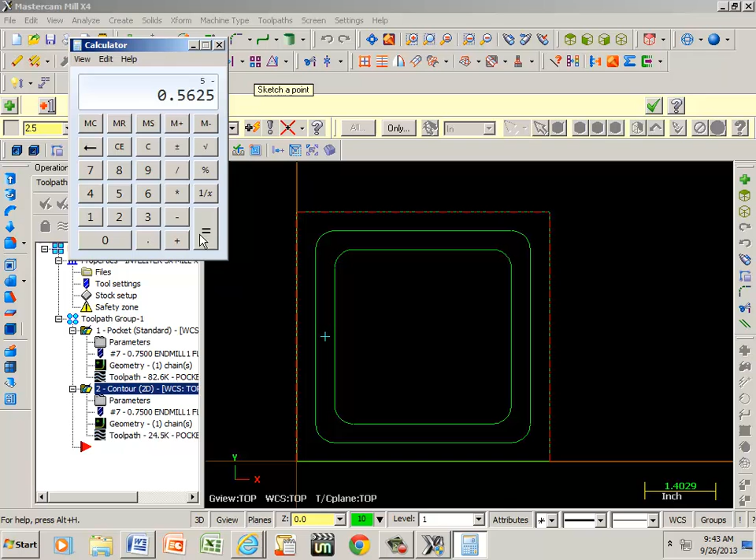All right, let's put one here. I know that half of it from here to here in my x-axis is going to be 2.5. Tab over. However, I'm not sure how far it is from here all the way up to here. I know from the bottom up to the top is 5. So I'm going to say 5 minus 9/16. Let's clear that. 5 minus 0.5625. It's 4 7/16, so 4.4375.

Okay. Now, since this is square, from here to here is 4.4375. That means that from here all the way over to here is going to be the same thing. So 4.4375, tab over, 2.5, tab. Okay, let's get to this point. Half of that is going to be 2.5, tab over, and 0.5625, tab. And now we have our points exactly where I want them. I'm going to hit green check for that.

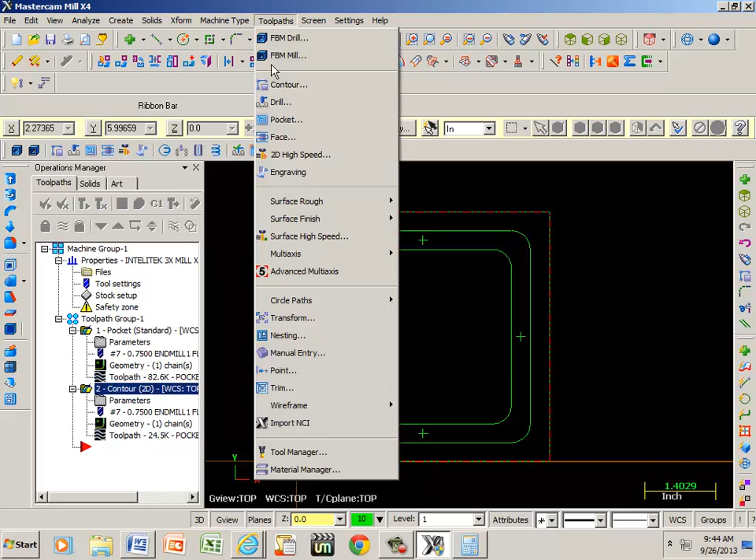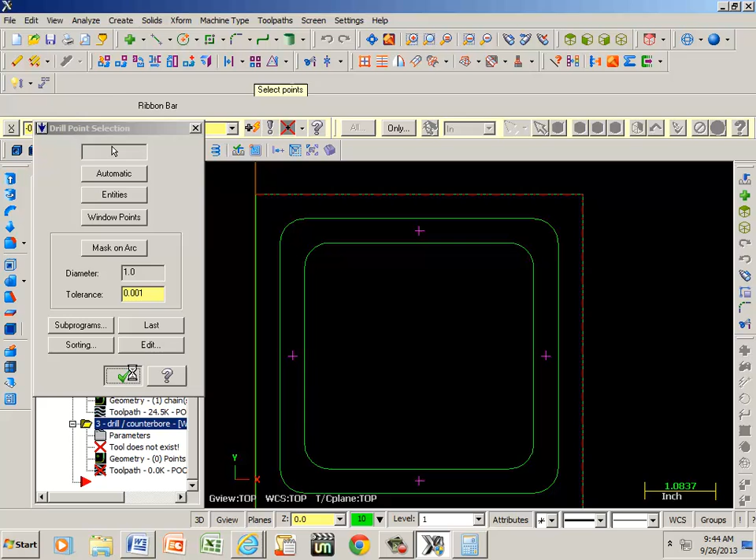And let's go to tool paths, and we're going to drill these holes. So we're going to select drill. Now, depending on where I click, depends on how it's going to drill these holes. And notice this too, whenever I get close to it, it just snaps right to the point. Click it, click that one, click this one, and then click this one. Green check. Let's go to tool, select library tool.

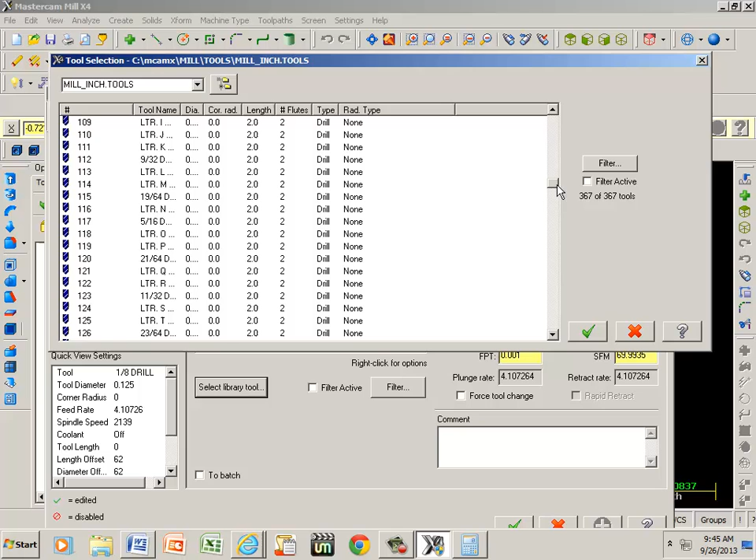Now I want to drill these holes 1/4 inch. So I'm going to look for a 1/4 inch drill. It's showing 261 of 367 tools. Normally I like to see all of my tools, so if I click this, I'm showing 367 of 367 now. Let's scroll down until I find a 1/4 inch cutter, which is 250 thousandths. And here it is here. I'm going to double click that.

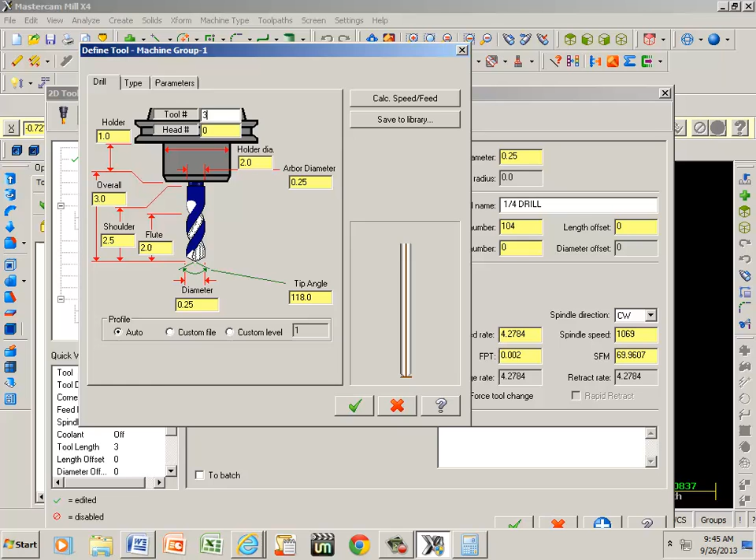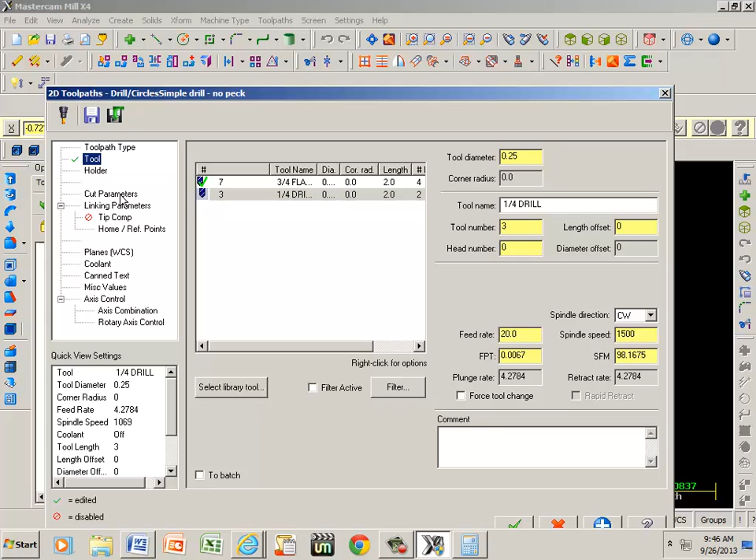Just like we did before, we changed that 3/4 to a number 7. Well, my 1/4 inch drill is a number 3 out there in the CNC machine. So if I double click that, change that to tool number 3. There, it changed it for me. Go ahead and change my feed rate. I'm going to drill it at 20 inches a minute. And notice I can go a lot faster than that now. I'm showing almost 70 surface feet per minute. I'm going to increase that to 1500. 98. That's very good.

Alright, cut parameters. It's showing drill and counter bore. Well, I want to do peck drilling. So if I click here, first option is peck drill. What peck drill does for us is it goes down, in this case 100 thousandths. It's going to go all the way back up to the surface. The chips come out, coolant flows in. It's going to go down to where it was at, an additional 100 thousandths until I give it the depth that I need to go. In this case, I'm going to go all the way through so we can see the bottom.

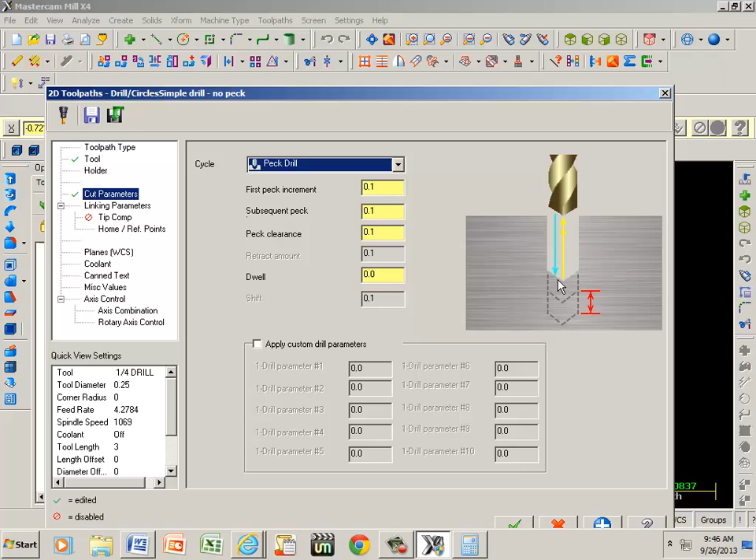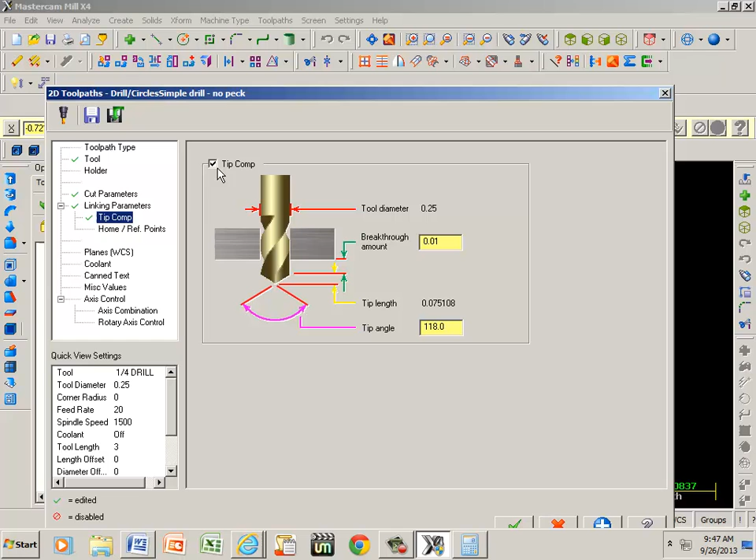And we know that the stock material is 1 inch thick. So if I go to linking parameters and I say negative 1.0, now if I go to tip compensation, I'm going to turn that on so I can show you what I'm getting ready to do. From the point to the full diameter is showing 75 thousandths. If I do not activate tip compensation, the very tip is just going to break through. Well, I want the full diameter to break through, so that's why I'm leaving it on tip compensation.

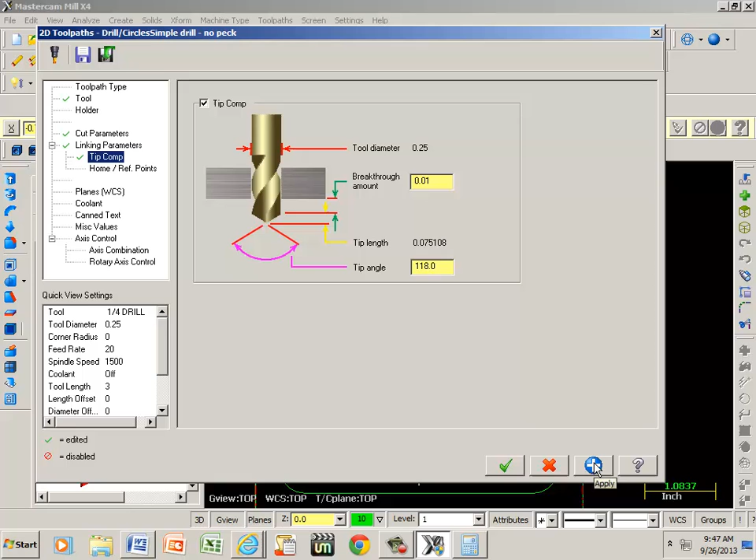Now, like before, I can turn coolant on or off. Just leave it off. That machine out there doesn't have coolant on anyway for the Intelitek. So if I hit blue apply, green check, here's my tool path. This is going to be my first one, second one, third one, and then fourth one. Isometric view. I'm going to select just that operation. Uncheck these. Check that one only. That way we can see it.

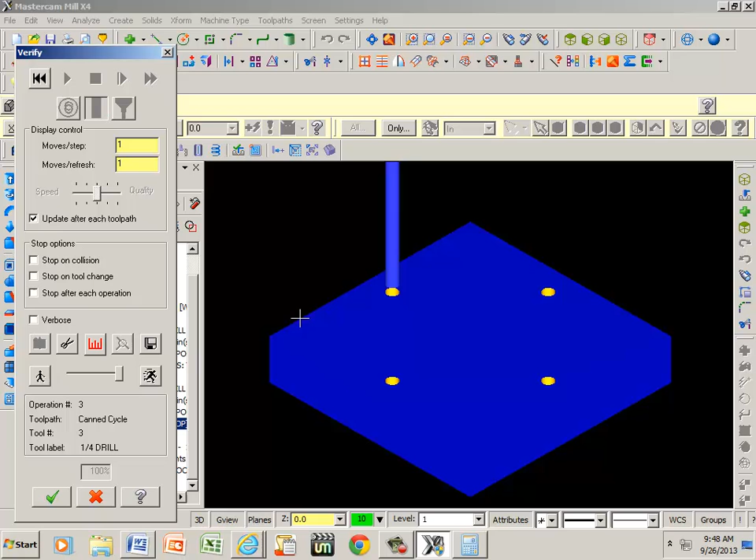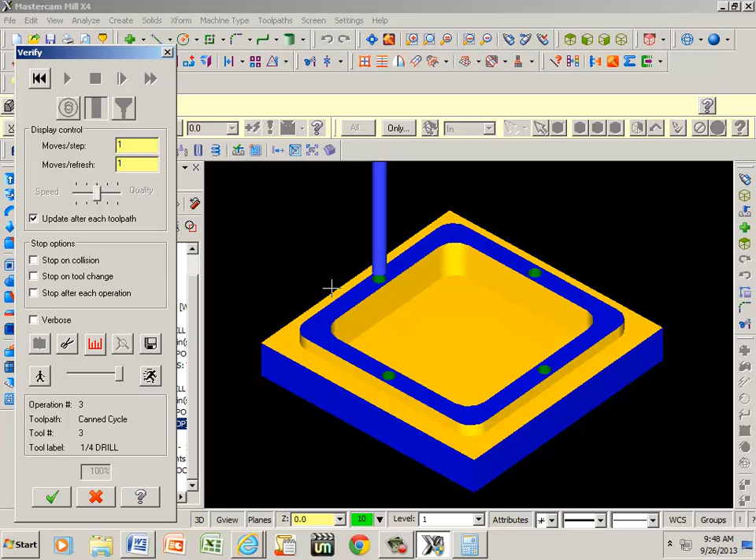Verify and drill. Dynamic rotation. Let's see what we have on the bottom side. Alright, the holes are drilled all the way through. Let's exit out of that. And let's select all of our operations. And let's verify. There you have it. A pocket, a contour, and drilled holes.

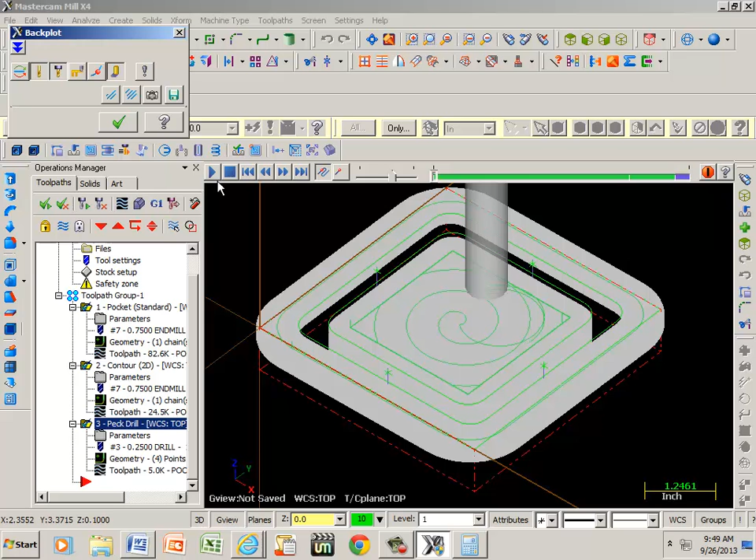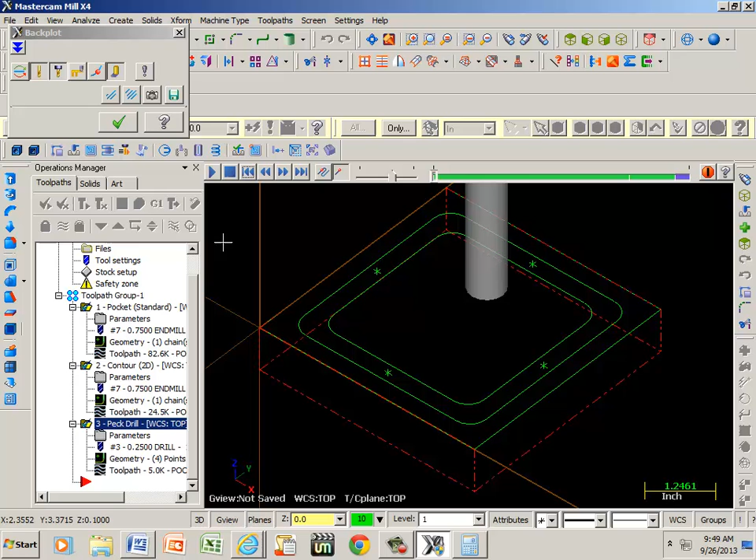Okay. Now, we can also do something called backplot. If I click on backplot, let's rewind it. There we go. Click play. We'll stop that. Let's run it again. I didn't want all those tool paths in the way. Play. And that's actually showing the actual tool path.

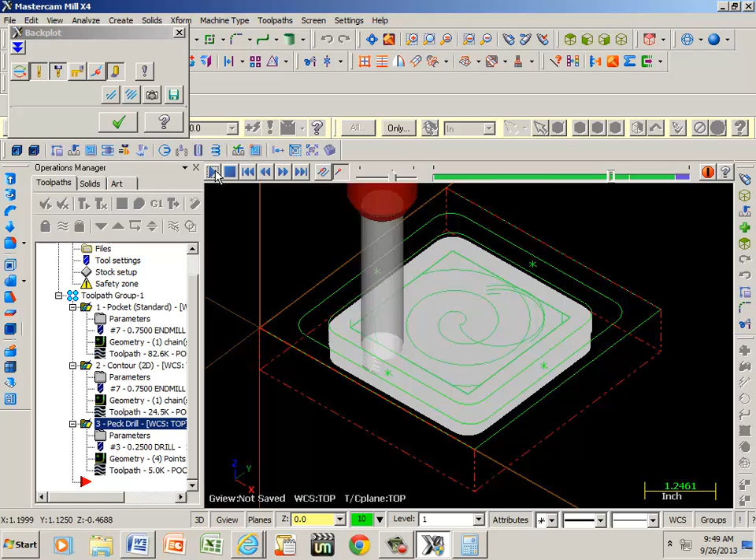About to finish the pocket. Now it's doing the contour. Change tools, and it drilled the holes. Now, if I want to see how long it took me to machine the entire part, I can click here on this blue drop down and go to info, and it's showing me at 26 minutes.

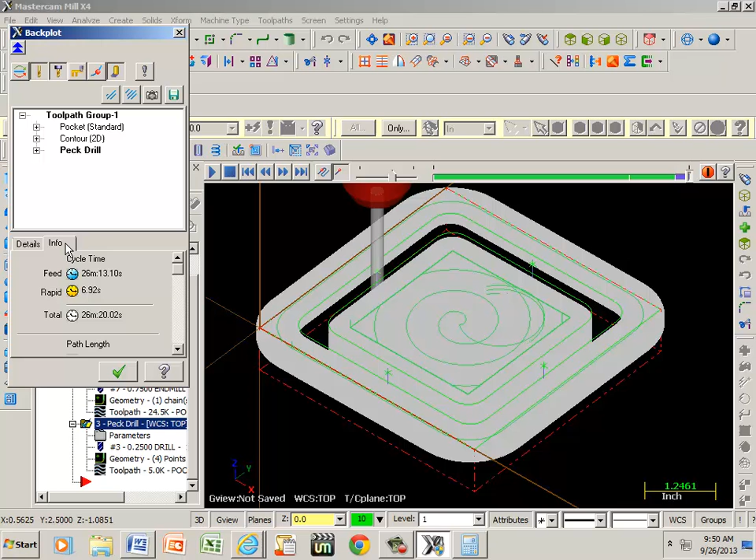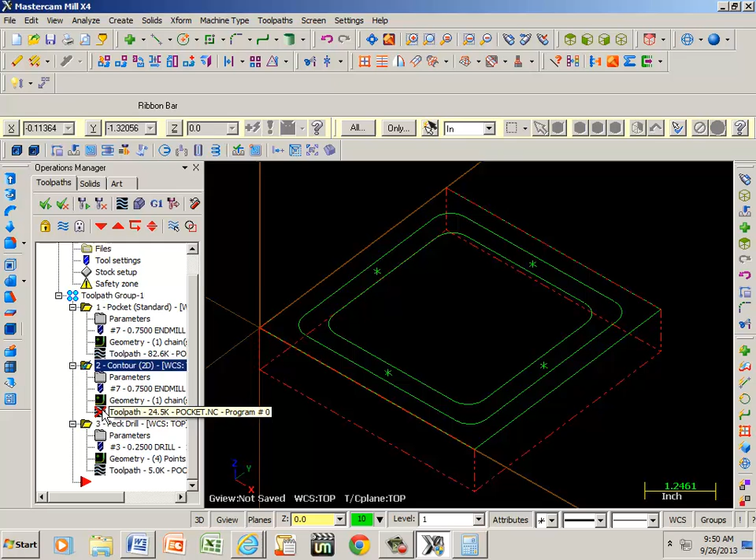Well, I can speed that up because I know I didn't change my feed rates on this one. 30, 15, rapid retract, blue apply, green check, clean up my dirty geometry, and now I'm at 3 minutes and 8.65 seconds.

Alright, well that's it, other than generating code, but we've already done that several times, so you know how to do that.